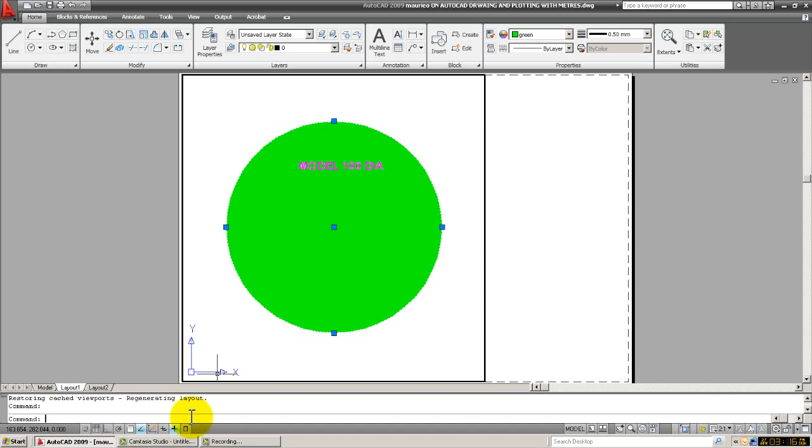Okay, well, the first thing we have to appreciate is that when we go into a drawing we set the units, and as a surveyor I usually set my units along these lines here. Decimal, obviously, precision, 3 decimal places, which is to the nearest millimeter, and I set it in meters. So that means that the drawing unit is units to scale inserted meters. I work in meters. You can work in millimeters, kilometers, anything you like really, but I prefer to work in meters. A meter is 1,000.

Okay, now I also, just by the by, like to use degrees, minutes and seconds to this precision here. I like them to be clockwise, so I click that there, and I also like my north to be at 0 up the page. 0 is north, so that's generally what I set my units to, and I'm all good with that. Okay, so that's fine, except when we come to plot things out.

Now when we come to plot things out, we have to set a scale. Now down here we have a plotting scale, or the model sort of scale here, and you can see that just changed there, but I've set that to 1:1 just before we go here. And now I'm just going to right click on the layout here and page setup manager, and I'm just going to modify it. So here we are.

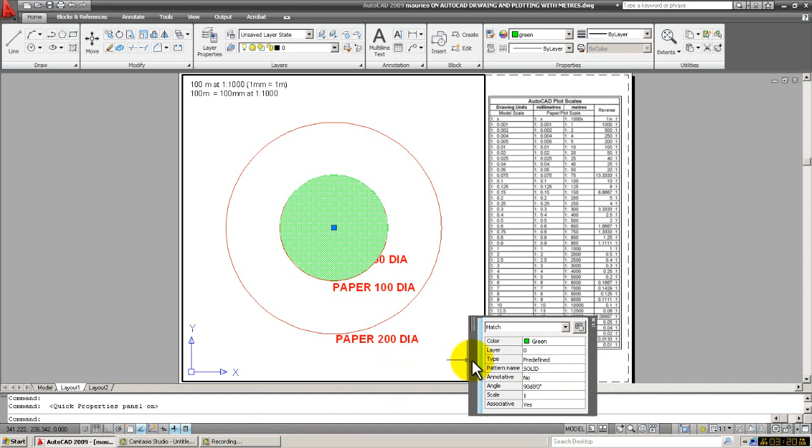This is a layout that I've produced in paper space. If we go into model space, it'll select the green there. In the quick properties, there's our circle - well, it's actually looking at the hatch rather than the circle. Let me click out and find it - yes, that's in our model space, and there's our circle, diameter 100, with the green hatch in the middle of it.

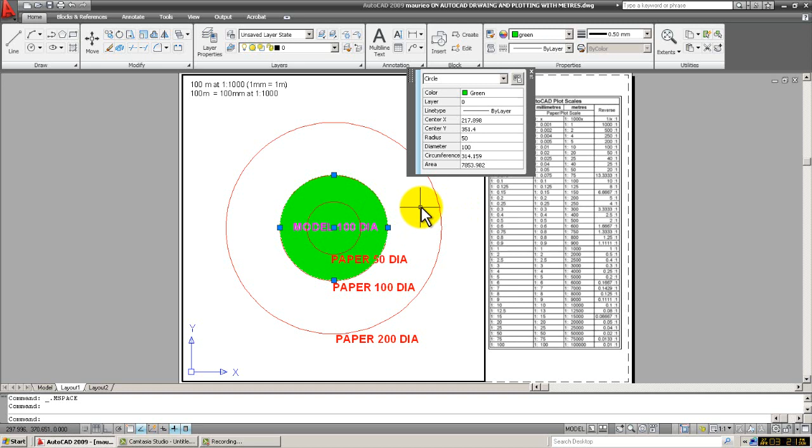So now if we go to paper space, I've just got a red circle there, and you can see that's got a diameter of 100 as well. Going back to model space, down here we've got the 1:1 viewport scale. So as you can see, we've got 100 diameter there and 100 in the thing.

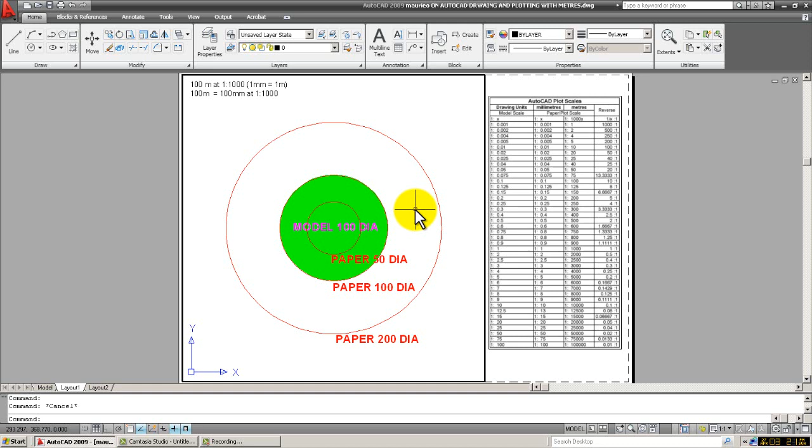That's at a 1:1 thing, which you'll find is actually because that's 100 millimeters in the model space representing 100 meters, and 100 millimeters in the paper space is 100 millimeters. So that's actually a scale of 1:1000, which you can see here - 100 meters at 1:1000, 1 millimeter equals 1 meter, so 100 meters will be 100 millimeters at 1:1000. Now it's that 1:1000 thing that we've got to bear in mind.

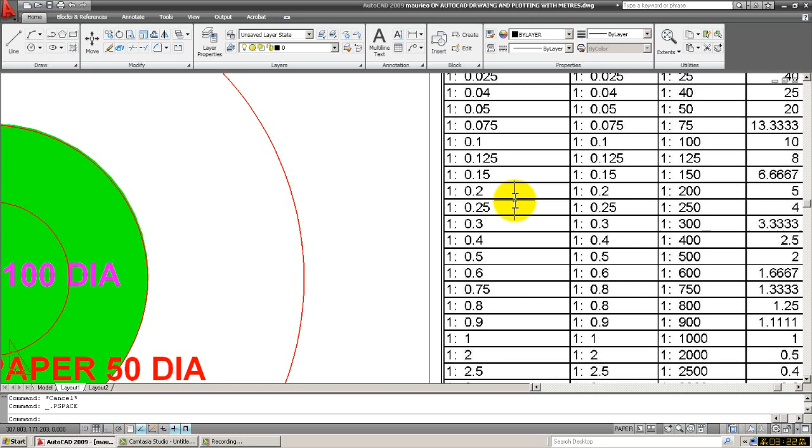So what I've done here is produce this little plot scales chart. Down here is the model scale, which is your 1:1. I'll turn that back to paper so we can zoom in. In this instance, we've got our 1:1 here, and if we were working in millimeters, it would be a 1:1 scale. But because we're in meters, it's a 1:1000 scale, and the reverse of 1:1 is 1:1. So that's what's going on there.

So let's see if we wanted to go for the slightly smaller scale of, say, 1:2000. Going down to my chart here, I've got 1:2000, and in the viewport scaling thing, I'd put 1:2. If we were working in millimeters, it would be 1:2 - 1 millimeter equals 2 millimeters. But because we're working in meters, 1 millimeter equals 1000, equals 2000 - 1 to 2 would equal 2000 millimeters.

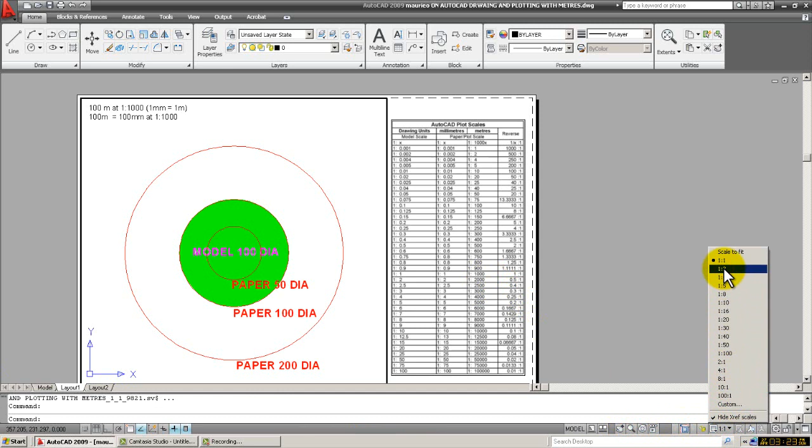So let's go back to model space here, and let's just swap to that 1 to 2 - and there we go, that's our 1:2000 one there. Now that's obviously still going to be 100 meters in model space, but in our paper space, it's going to be a diameter of 50.

So let's have a look up here. 100 meters at 1:2000, we can see that 1 millimeter equals 2 meters, so 100 meters will be 50 millimeters. So the diameter was 100, and now it's 50 millimeters at 1:2000. Looking at our chart, here's our 1:2000 - so we want 1 to 2, and 1 to 2 will give us 1:2000. Note the reverse of that is 0.5 to 1, which I'll explain with our next one.

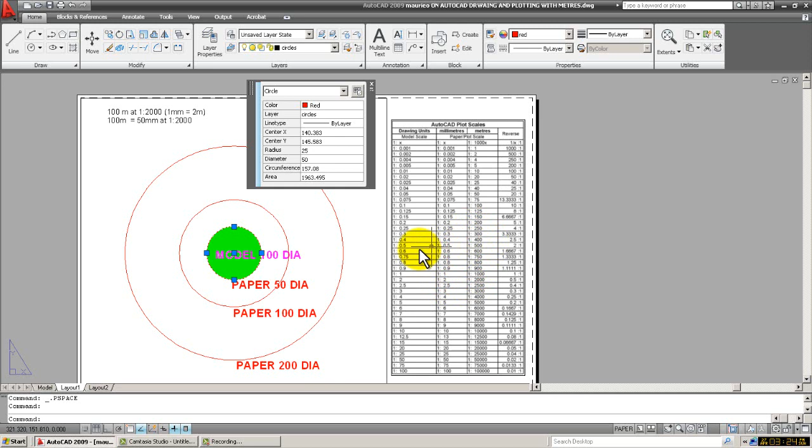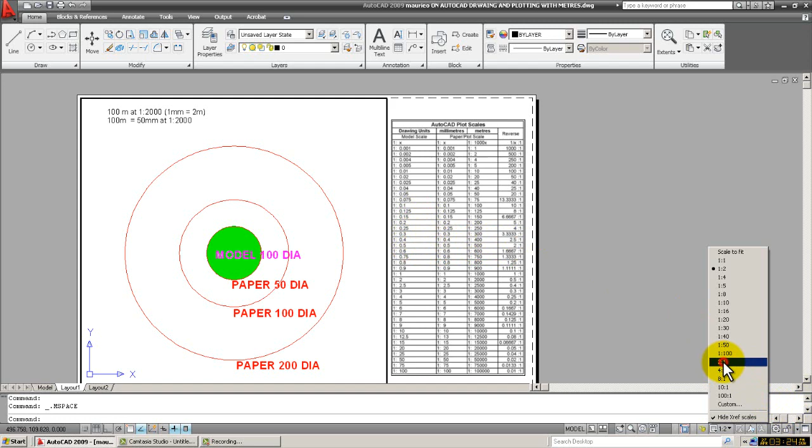So okay, what happens if we want 1 to 500? Well, at 1 to 500, we look up here 1 to 500, and we can see that in terms of our model scale, that would be 1 to 0.5. But when we look through here, we don't have a 1 to 0.5, so we can reverse that. 1 to 0.5 is the same as 2 to 1, and we have a 2 to 1 here. So the 2 to 1 would be our 1 to 500. Let's just click on the 2 to 1, and there we go.

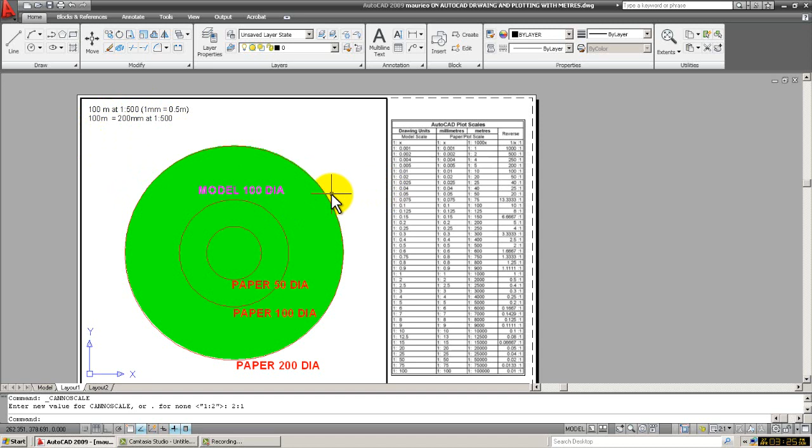We can see that the model space is now gone. It's gone bigger, and it's still 100 meters in model space, which is 200 millimeters at 1 to 500.

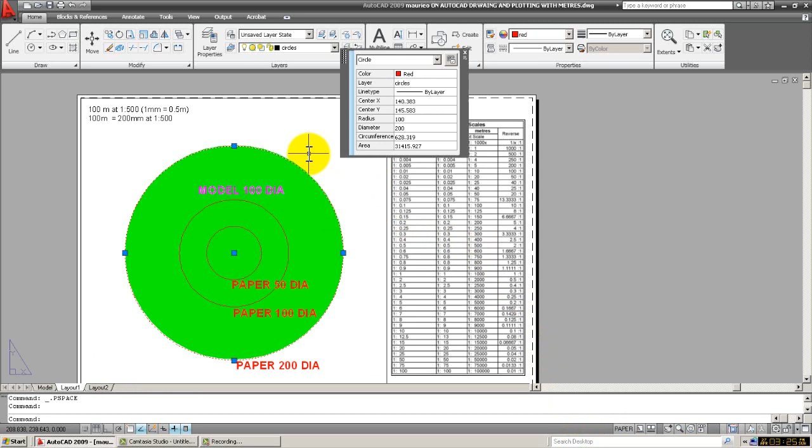1 millimeter equals half a meter, so 100 meters will be 200 millimeters. We click on there, and there we are. We can see that straight away. That's because we're in model space. In model space it was 100, but if we go to paper space, we can see that's now a 200 millimeter diameter, as we predicted.

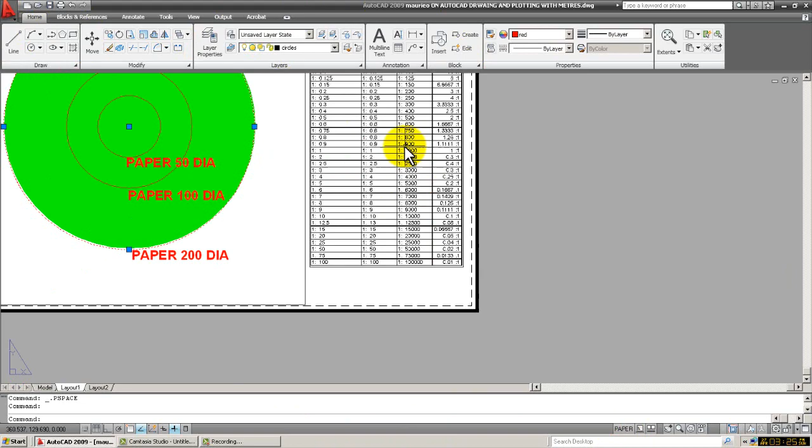So what do we do? Let's just close that. We're in paper space here, so we can just flick down. The thing is, whatever scale we want to plot out at, these here are generally accepted as the sort of standard scales that you use. So what sort of method could you do?

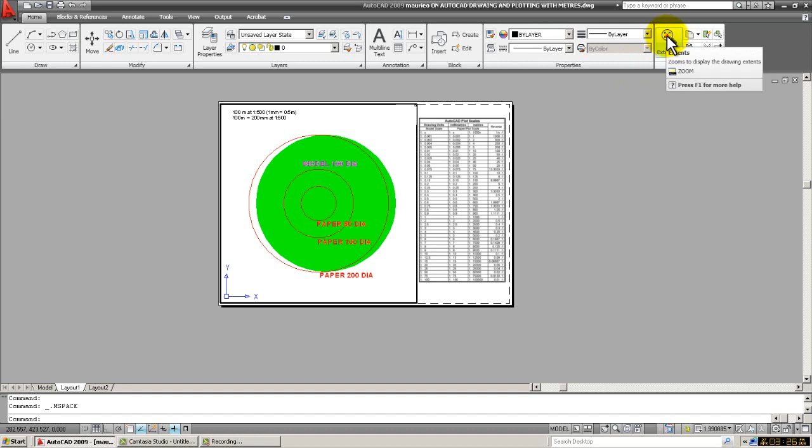Well, one of the things that you could do is actually come down here, and if you go into paper space, you can just go in here and zoom paper space to whatever you want, or you could go for your extents here. Oh, that's not good.

And Control Z gets us back to here. So you can adjust that. You might want to go slightly bigger, perhaps like something like that. And you can see down here that that's got straight away.

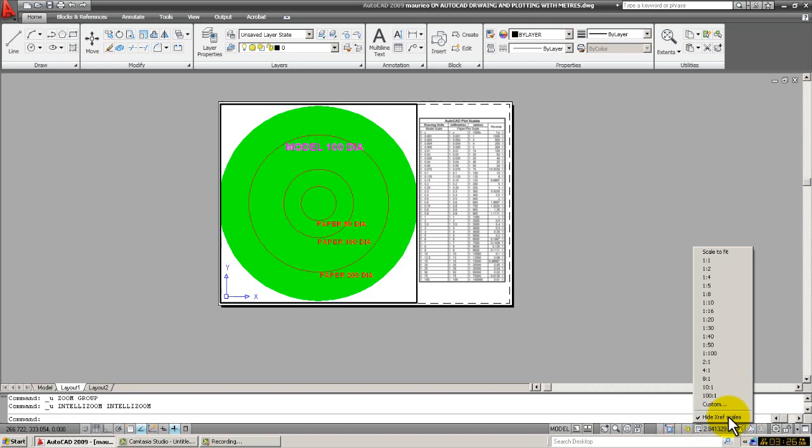It's got 2.841. That's... yeah. Let's just go back to one to one for a start, and then see how that goes.

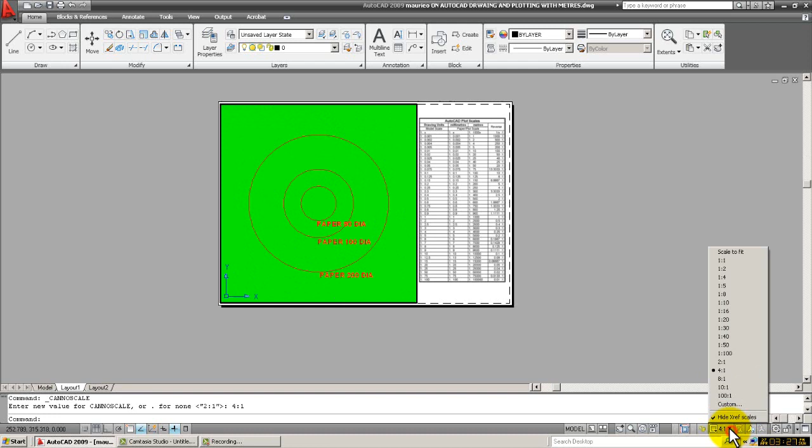And then if we can go bigger than that, so we can go 2 times that. We were going 2 to 1, and then we could go maybe 4 to 1. That's too big, so we could nip back to 2 to 1, or we can go with some sort of custom scale even.

We can go to a custom scale here, and just looking here, we could maybe edit one, or add one. So the name of our custom scale - in there we had 2.8.

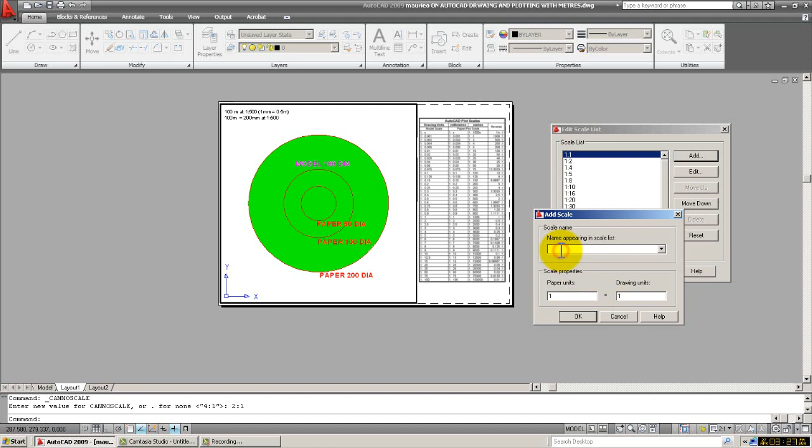So if we went to 2.5, 1 to 2.5 perhaps, 1 to 2.5, we could put that in. And paper units - just have a quick check here, maybe just have a look at...

The 2 one there, just edit that. Oh yes, 2 paper units to 1 drawing unit, cancel. So we could add one here, that was...

2.5 to 1, and that would be 2.5 paper units. Okay, all right.

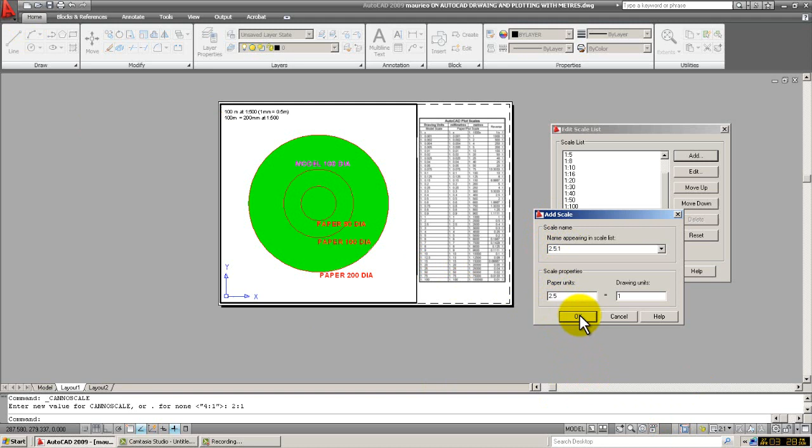And then we could maybe - we've got that one there, we could select it, and we can see that that's slightly bigger. And then, just looking at our chart here, it's sort of...

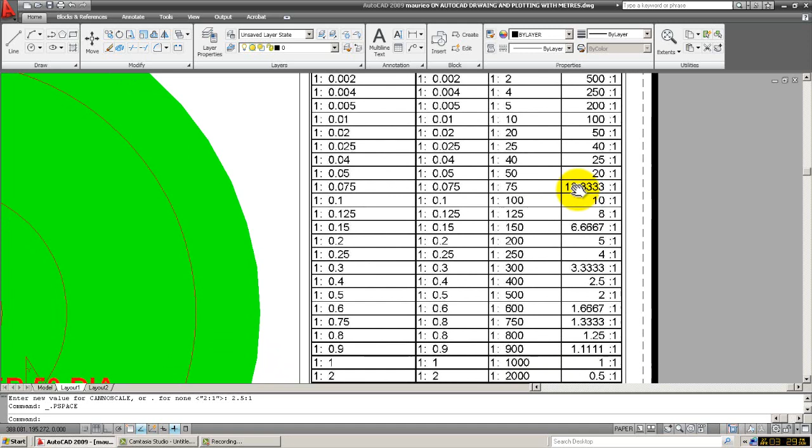2.5 to 1, which is going to be - there it is there, 1 to 400, 2.5 to 1.

So we could go to 1 to 400, we could go to 1 to 300. We saw that we had 2.8, but there's nothing really in that area.

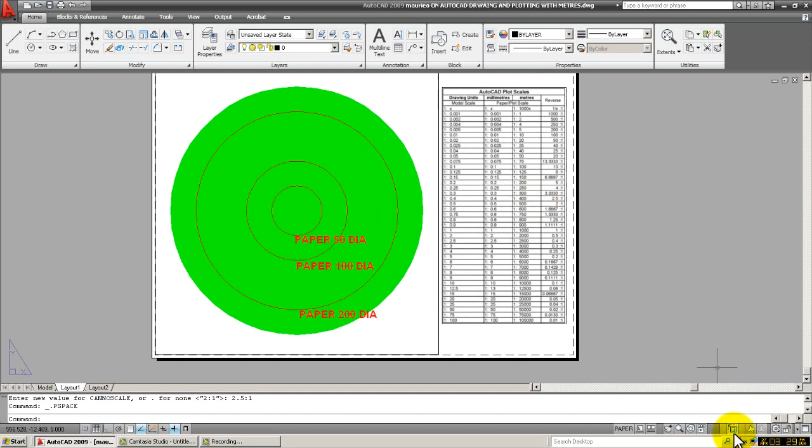So there you go. I'll just flick this back to give you another look here. Back to 1 to 1. So there you go, back to paper space, click the extents.

There you go. That's a little bit of a look at how you can work in meters in your model, and plot it out into recognized scales from your paper space and into your layouts and what have you, using my little chart there, which is fairly simple.

You'll see there's a bit of a generic thing here: 1 to X if you're using millimeters, 1 to 1000X if you're using meters. And for the reverse, it's just 1 over X - 1 over X to 1 would be the same one. That's how I've generated all of those things there.